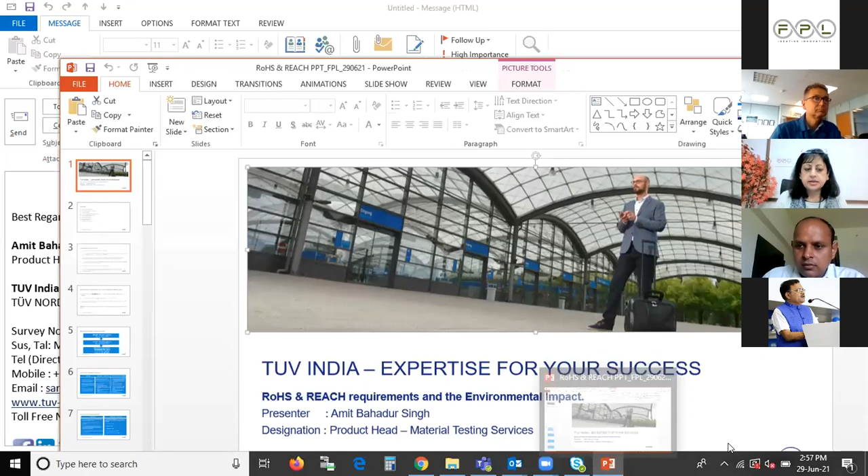Are you able to share your screen? Is it visible to you? Yeah, it's visible, this is my screen. It's visible, yeah. Can you put it on slideshow? Yeah, now it's on slideshow. Yeah, good.

So in the meantime, I'm sending these slides to you also. Yeah, please send it because somehow in between I'm losing connection, so I think I'll have to connect over mobile and put you on the speaker. Connection is weak, Alexi, your connection is okay na? I think we can hear you loud and clear. Yes, it seems okay today. And what about me? Yeah, it's okay too for me. Your signal is going off in between, coming.

So Amit, Velumurugan, can you just see if we can put him on speaker? Just do a try, we call him on phone and put him on speaker. Yes, we have connection issue here. No, Amit Bahadur, hello, I think I'm clear to everyone now. Yeah, you are clear, you are clear. Now you are clear.

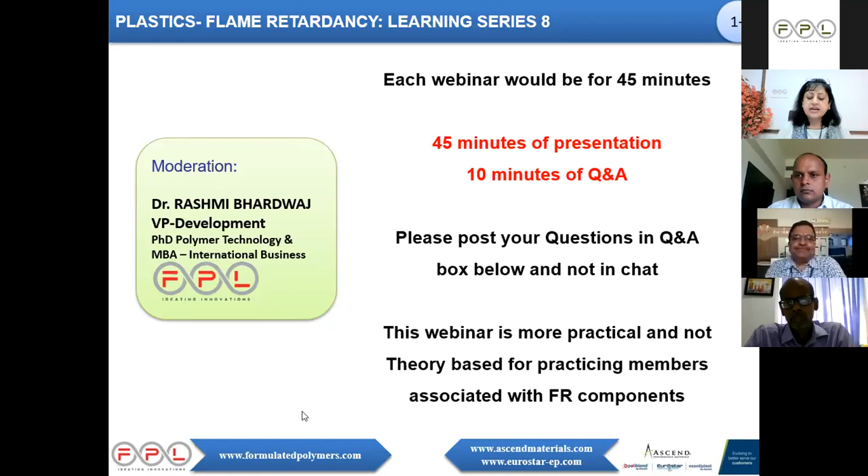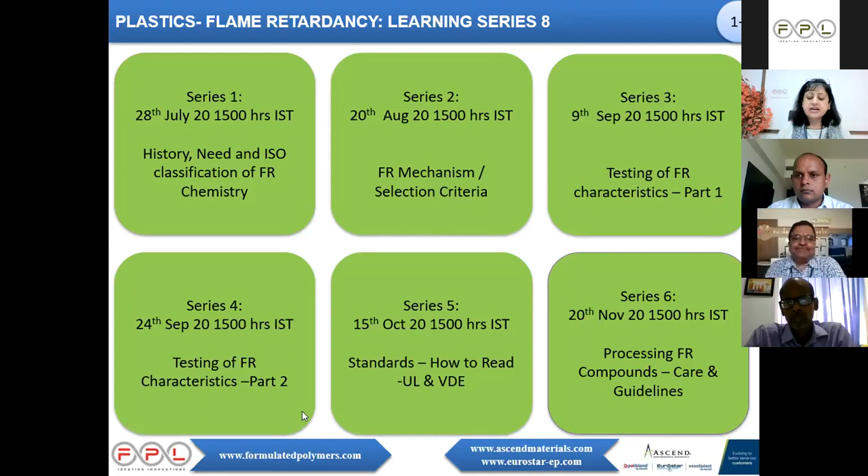Just a quick recap that we have already done Series 6, where we have gone right from history to mechanisms, testing, characteristics, standards, UL, VDE, processing, and we've also covered the design perspective. Today's session is the 8th session, on environmental impact. There are around 4 more sessions planned as of now, but we can take it further in case there is more interest.

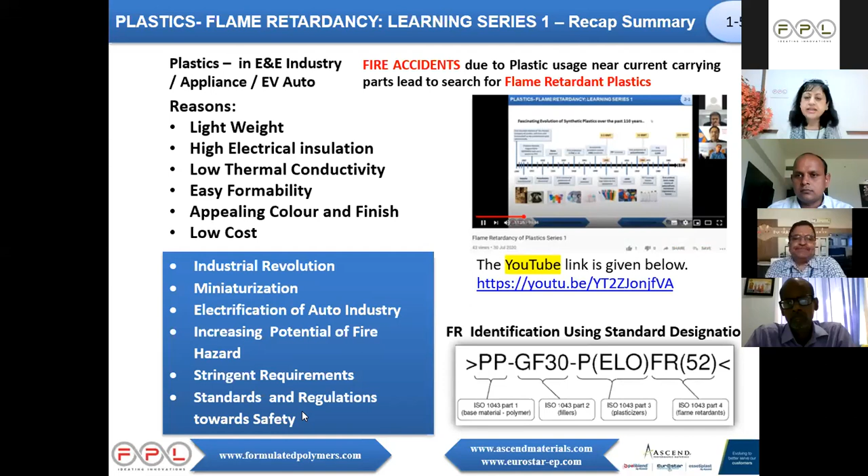So if I go back to our sessions, what we covered earlier was basically flame retardant plastics, and what ISO norms are being followed by all of us, especially in terms of classification. We covered the flame retardant mechanism in Learning Series 2.

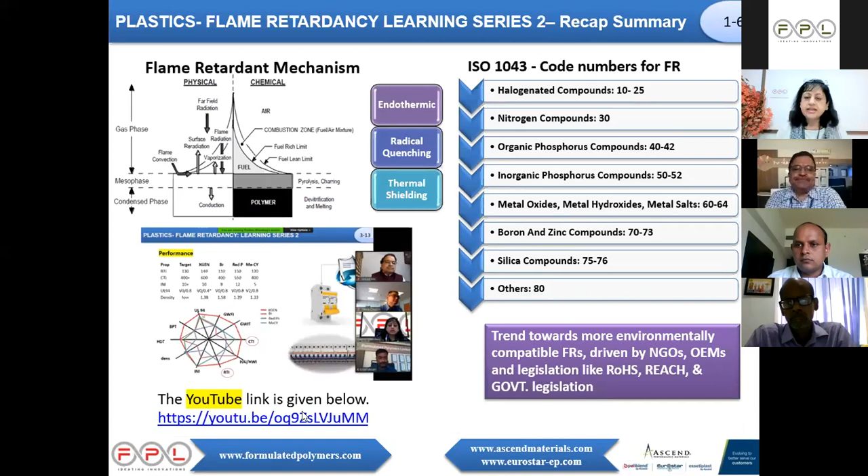In Learning Series 3, we had Mr. Krishnamurthy and Alexei giving 2 sessions, 3 and 4, with respect to UL94 testing and glow wire testing, because sometimes we consider them similarly but we have to understand the total mechanism and the reason why these tests are done. So we had this entire session.

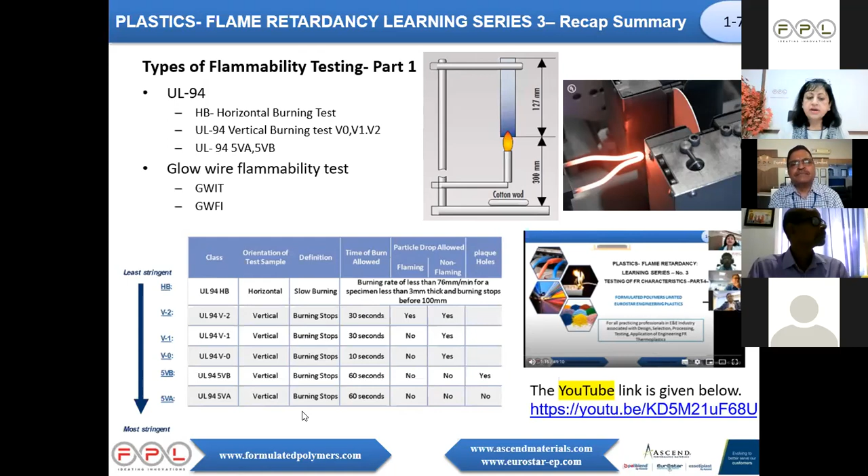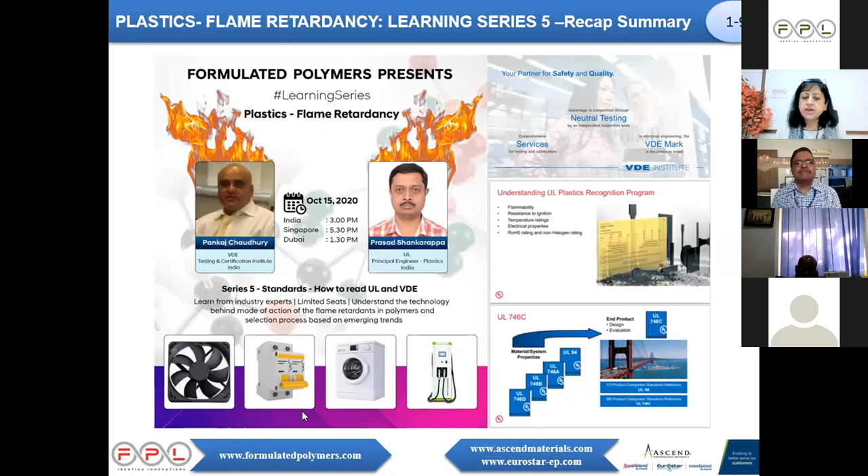Series 5, where we covered standards, like how do you read a UL standard? We are all aware of UL standards, but sometimes we don't have clarity in terms of what we have to read in those standards. So we had a session with Mr. Chaudhury on VDE, who's head of India operations for VDE testing and certification.

Then we had another session in terms of processing, that's Series 6, where Mr. Satish Kumar, Principal Architect at Schneider, and Alexei gave us their insights on how to process FR compounds, what is important when we are processing these compounds, and how do we capture the part quality and consistency for these materials.

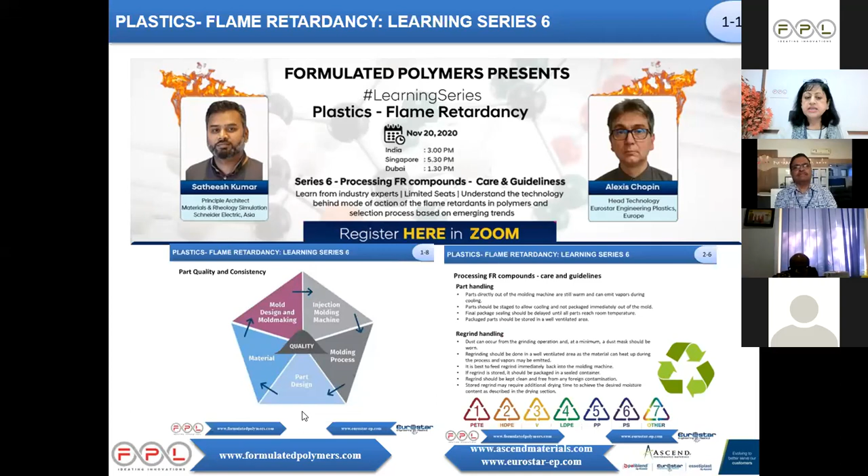Then the last session, earlier this year, was on design perspective in flame retardant components, where Mr. Prashant Vairagi, who was earlier with L&T, now with Schneider, gave an overview of switchgear applications. And in his presentation, Pradeep Chowdhary discussed in detail regarding product design optimization with

FR compounds. That's like disruptive innovation in product design, manufacturing, engineering, and simulation, where he covered a number of applications, right from simple automotive applications, the general purpose ones, to the specialized applications and the requirements in terms of design, where aesthetics is important as well as technical functionality.

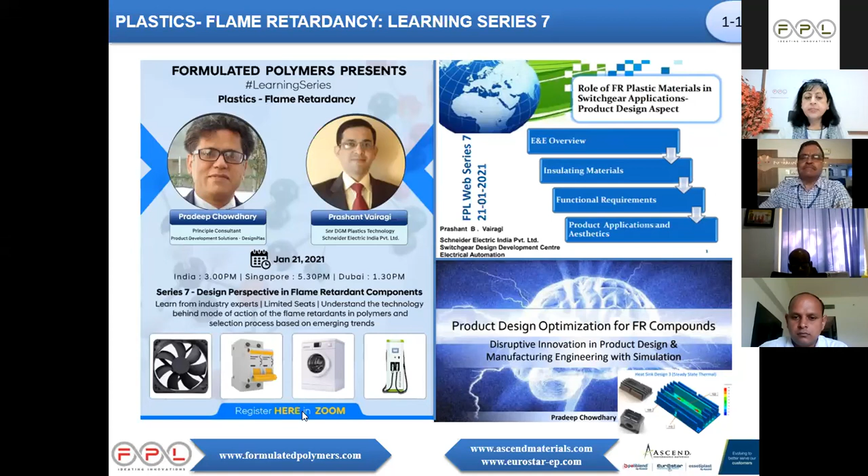Now coming to this session, we have our speakers on the environmental impact. Mr. Amit Bahadur Singh will be presenting from Eurostar Engineering Plastics, now Ascend Performance Materials. Some of the industry professionals have agreed, and some have already presented, and we would request

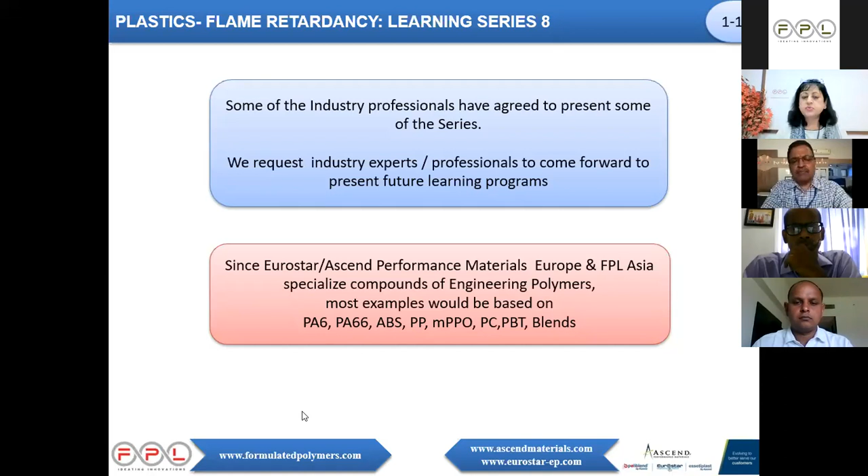Just to cover basically, STARFLAM is manufactured by Formulated Polymers Limited and Ascend Performance Materials, and is available in both reinforced and unreinforced polyamide grades with high impact and tight tolerances, flammability values of UL94 V2 to V0 down to 0.4mm thickness, 5VA, 5VB classification, as well as UL746 polymers like polypropylene, ABS, PC, PBT, etc.

So we have around 120 UL yellow cards. Comparative tracking index values go up above 600 volts. RTI above 120 degrees centigrade up to 150 degrees centigrade. Various compliances which we are discussing today in detail. Excellent ductility and low warpage, easily laser markable.

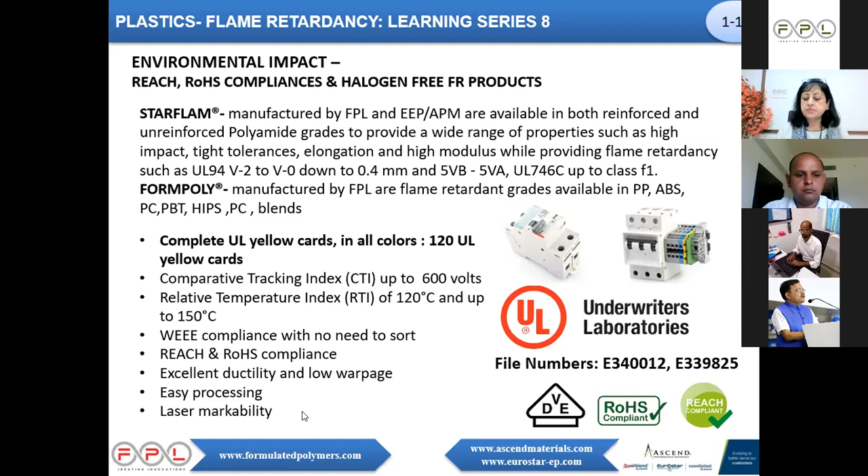Just to give a brief about our speakers, Mr. Amit Bahadur Singh is based in Pune. I've shared his mobile number and email ID just in case someone wants to get in direct touch with him; you can communicate by mail. Amit Bahadur Singh has 12 years of experience, a versatile background having worked with Huhtamaki, Positive Packaging, and SGS India Private Limited, presently with TUV. He has an MSc in Physics, a Masters in Marketing Management, and rich experience in REACH, RoHS regulatory compliances and product risk management. He is a CQI IRCA approved ISO 9001 quality management system certified lead auditor.

So we look forward to hearing from him regarding what is the environmental impact, what exactly REACH and RoHS are, why are these compliances so important, and why it's gaining even more importance as we move forward. So we look forward to you, Mr. Singh. The other speaker is Mr.

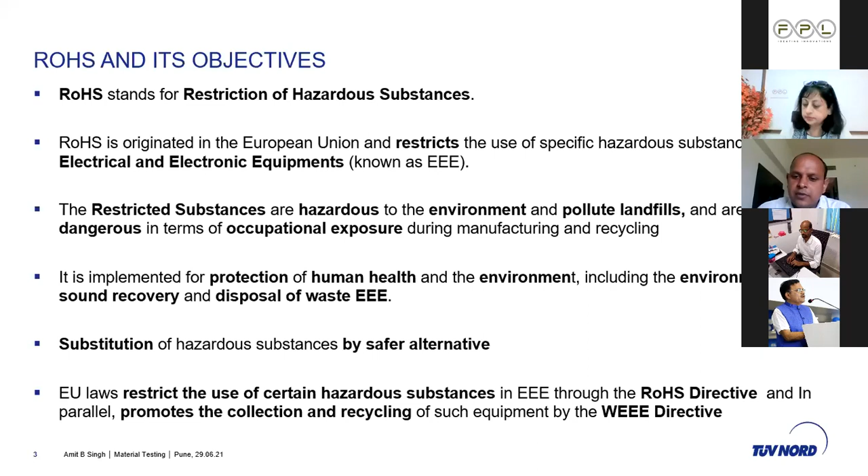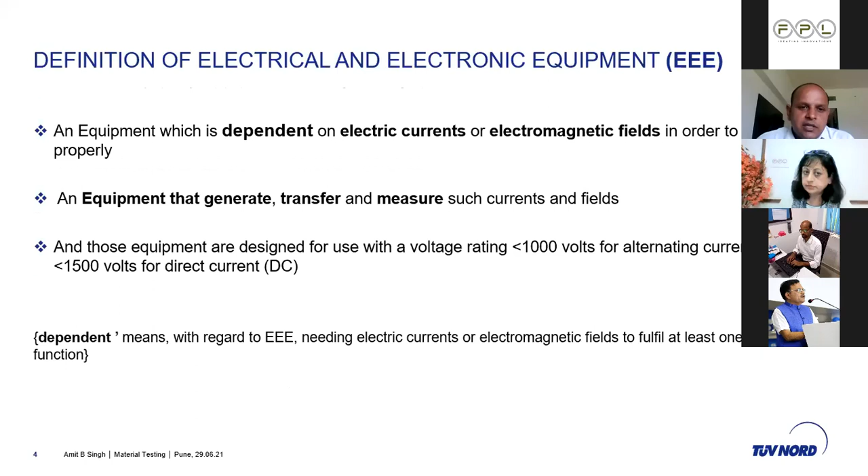This is the definition given in RoHS 2: any equipment dependent on electric current and electromagnetic fields to work properly, or equipment to generate, transfer, or measure such currents, is considered electrical equipment. EEE is considered as such if voltage rating is less than 1000V AC and DC voltage is less than 1500V. This is the journey from the initial directive 2002/95/EC, that is RoHS 1, to RoHS 2 and its amendments.

RoHS 1 came into effect on July 1, 2006. RoHS 2 came into effect with a second amendment in Annexure 2, adding 4 more elements to the hazardous substance list. It came into force on 22nd July 2019, and will be fully effective from 22nd July 2021.

So we are discussing RoHS 1. In the RoHS 1 overview, there was no formal certification, declaration, or labeling system for attesting compliance. Two categories were exempted: medical devices and monitoring control instruments. Producers or manufacturers of EEE had to show evidence only when asked by authorities. There was no formal certification like a CE mark or a testing RoHS-compliant logo on the product; it was not a requirement of RoHS 1.

In RoHS 1, 6 elements were listed: lead, mercury, cadmium, chromium 6, PBB, and PBDE, basically known as flame retardants. The categories covered in this scope were taken from the WEEE directive, which listed 10 categories. RoHS 1 covered these, and 8 and 9 were not in its scope.

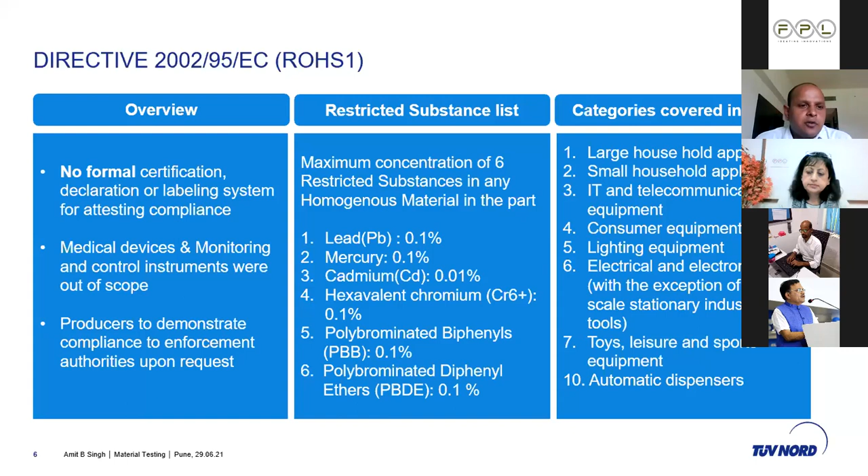RoHS 2 is a recast directive to make it simple, effective, and enforceable. Earlier there was no clear definition for EEE, and no clear definition of the manufacturer's obligations. This recast directive, RoHS 2, came for aligning and harmonizing with other EU legislation, and it covers all EEE not covered under categories 1 to 10 by introducing a new category, category 11, under which all remaining things were covered.

The list of substances does not change in RoHS 2. The same 6 substances listed in RoHS 1 are listed in RoHS 2, and their maximum concentration is calculated on a homogeneous material basis.

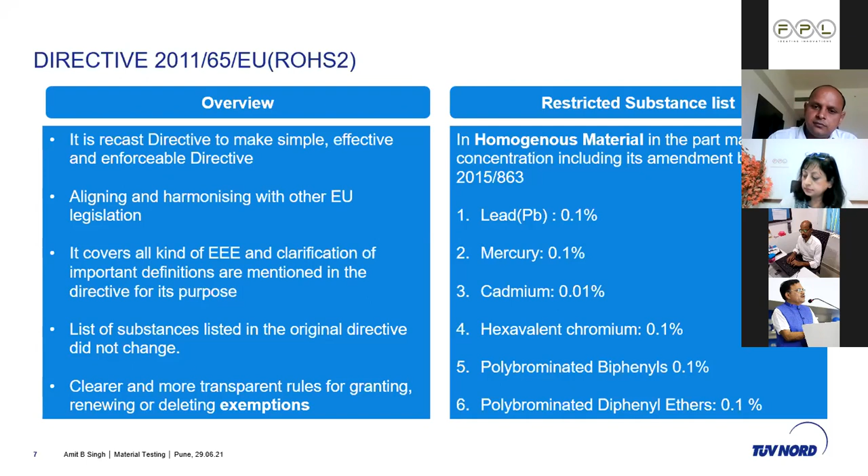So nothing is left. As I told you earlier, this came as a recast directive, and the purpose was to align these requirements with other regulations. They have given a special condition that RoHS shall apply without prejudice to requirements of union legislation on safety and health, and REACH, and requirements of specific union waste management legislation. So RoHS will be applicable, and these other regulations will also be applicable side by side, like the REACH regulation.

So what is out of scope? Anything for national security and military equipment is out of scope. Equipment sent to space. If any equipment is part of an exempted category, that equipment will also be exempted, like large scale stationary industrial tools, non-road mobile machinery, and active implantable medical devices. So these are the categories actually out of scope from RoHS. Otherwise RoHS is applicable.

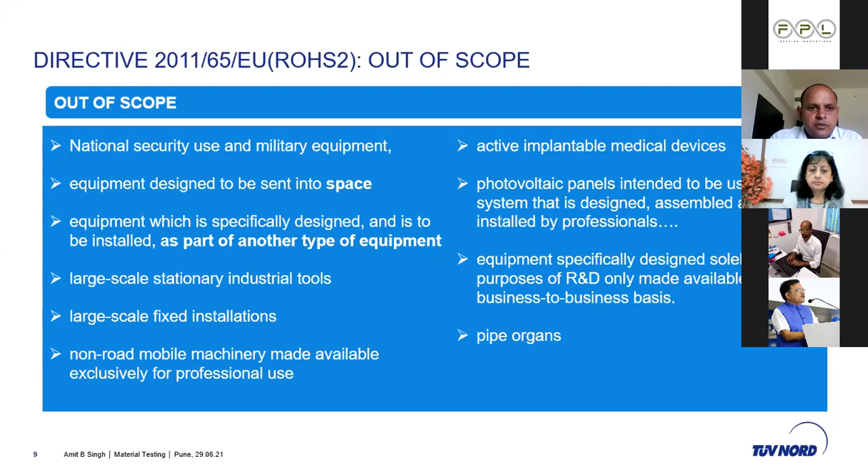So the highlight of RoHS 2: as we discussed, there was no category 8 and 9 in RoHS 1. This RoHS 2 added these categories, and introduced category 11, which impacts wires, cables and connectors.

Application exempted: they have exempted all categories except 8 and 9, and other categories also, like medical devices and monitoring devices. They have a separate exemptions list, listed in Annexure 4. Annexure 5 gives the format for granting, renewing, and revoking exemptions. So anybody who wants to apply for the grant of exemptions, or wants to renew or revoke exemptions, has to apply using this format.

And there is a format given for the European Declaration of Conformity. So if any manufacturer wants to place the EEE in the European market, they have to use this format for the declaration of conformity.

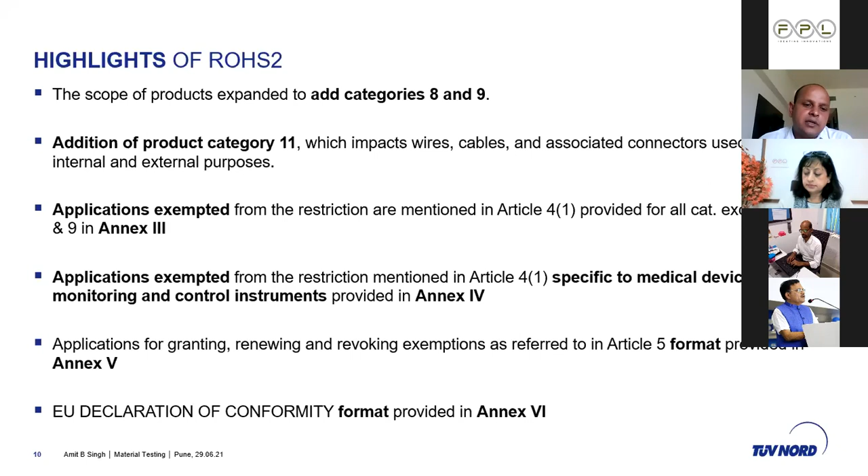So in RoHS Article 7, the manufacturer's obligations are mentioned. Other obligations are also mentioned in this RoHS directive, like importer's obligations, supplier's obligations, and so on. But I have taken only Article 7, which is applicable to manufacturer's obligations. They have given that manufacturers have to draw up technical documentation, carry out internal production controls, and provide a declaration of conformity statement along with the EEE, meaning electrical and electronic equipment, and they have to affix CE marking. So now if anybody affixes this CE marking, that means the product will be considered a RoHS compliant product.

And RoHS 2 Article 18 covers market surveillance requirements. Earlier, in RoHS 1, there was no such requirement, but in this RoHS 2 directive, it is especially mentioned.

Requirements for CE marking and declaration of conformity became effective from 2013. Additional record keeping requirements also became mandatory to demonstrate compliance. So during the service life of equipment, if enforcement authorities ask for compliance documents even after 10 years, you must have those documents. This is a mandatory requirement.

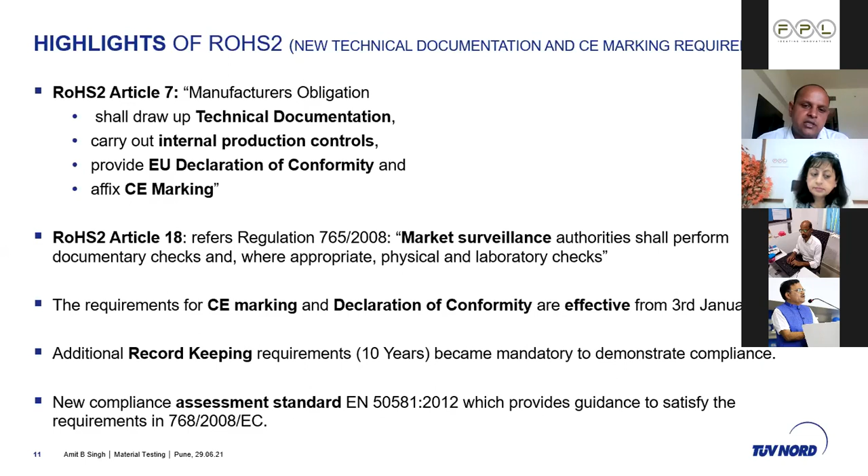And they came up with the assessment standard EN 50581:2012 also, to fulfill the requirements of 768/2008/EC, which are mentioned in this RoHS directive.

So there is one amendment directive that has come for RoHS 2, known as 2015/863, but people in general are saying it is RoHS 3 - but it is just an amendment to Annexure 2 of RoHS 2. This amendment added 4 phthalates: DEHP, DBP, BBP, DIBP, with a max limit of 0.1%. So now the total list has become 10 substances.

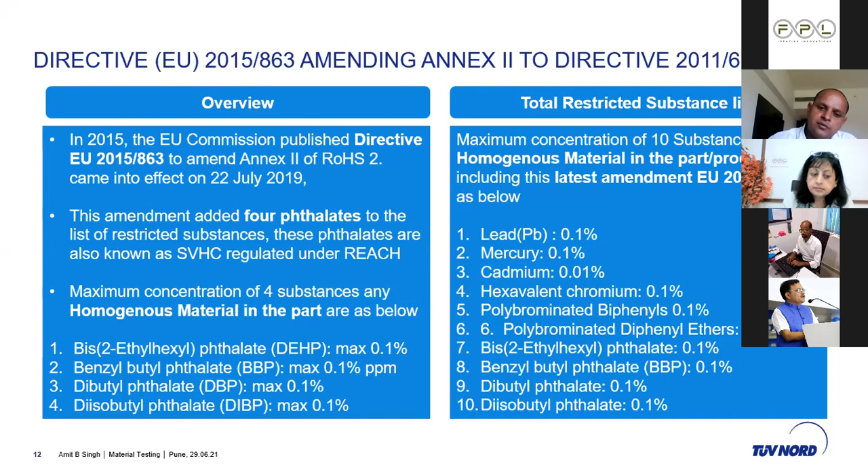So if anybody wants to comply with the RoHS requirements, RoHS 2 requirements, they have to comply with this amendment directive also. They have to see the compliance and observe the limits mentioned for the 10 elements.

So what are the requirements for compliant products? They should comply with maximum concentration values per homogeneous material, for the 10 elements, and also comply with the procedural requirements, like submitting a declaration of conformity statement and affixing the CE marking logo on their EEE or product. These are the mandatory requirements.

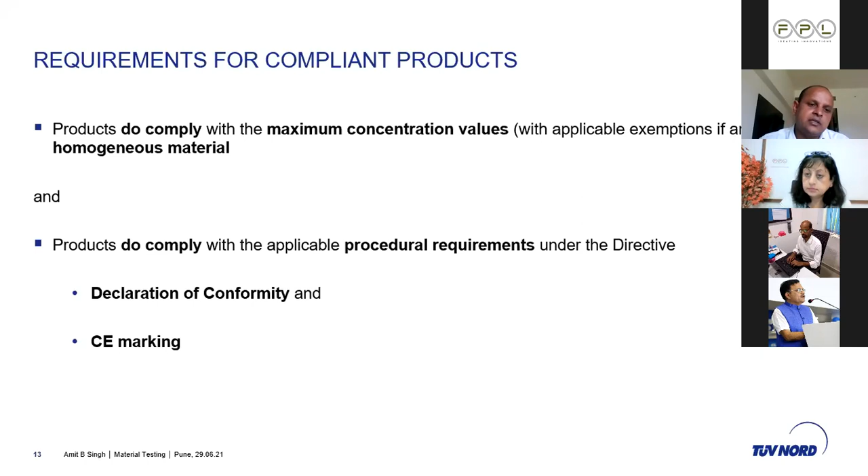If anything is missing, it will be considered a non-compliant product. Like if you are complying with the maximum concentration values per homogeneous material, but not submitting the declaration of conformity along with the equipment, it will be considered non-compliant. If you are submitting the DOC but not affixing the CE marking logo on it, it will also be considered a non-compliant product.

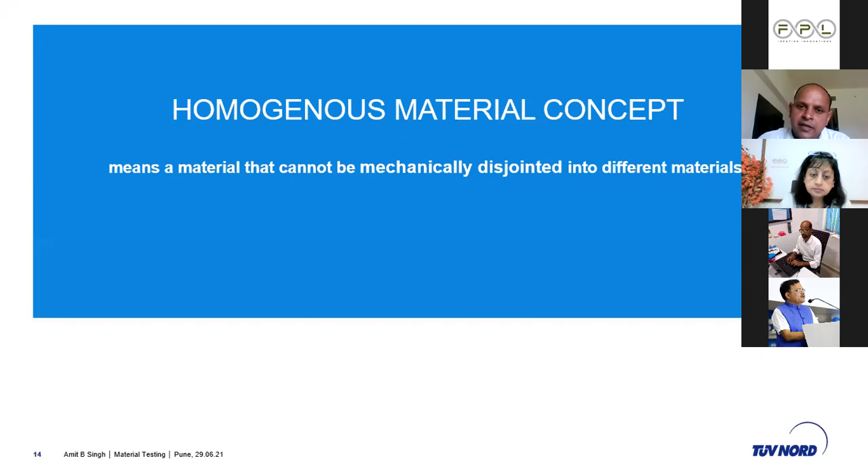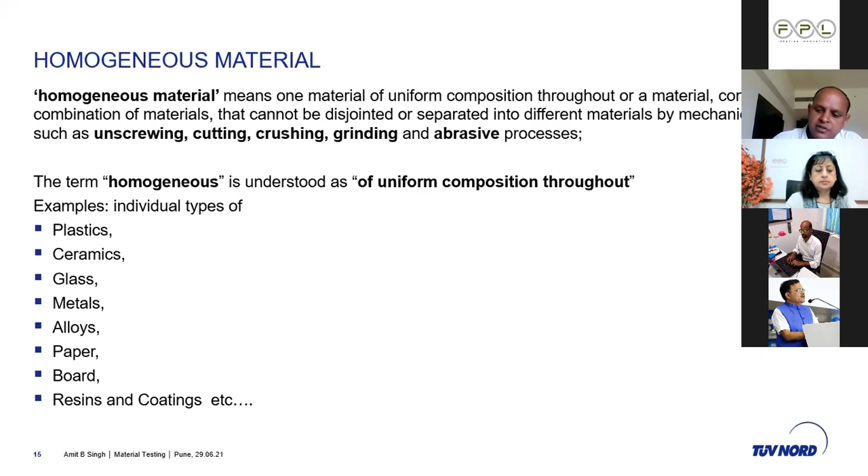So basically, we always talk about maximum concentration limits of 10 elements in homogeneous material concept. Homogeneous material is a concept actually defined under RoHS 2 only, meaning any uniform composition throughout the material, or components we cannot actually separate into different material by unscrewing, cutting, crushing, grinding, and abrasive process. Those components will be considered as homogeneous material. Examples are plastics, metal, alloys, paper boards. This is just for illustration. So if we have a mixer grinder, we have to test for maximum concentration at our laboratory. So we will actually go for this process.

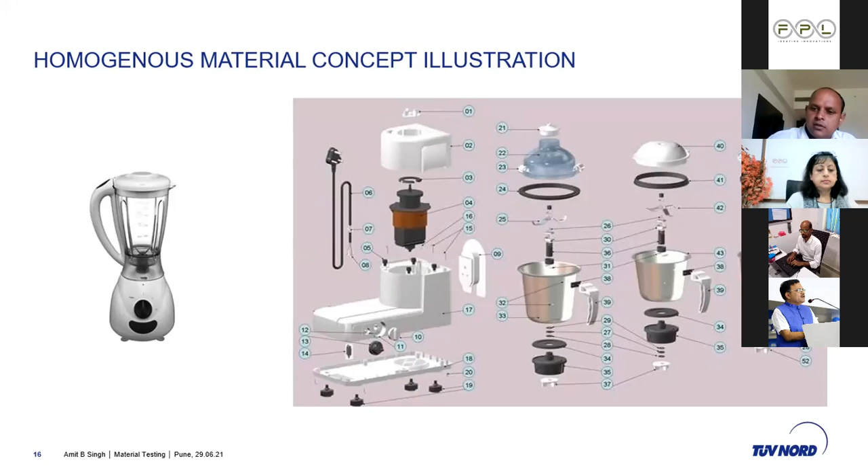So this was actually an overview of RoHS 1 and RoHS 2 and its amendment. Now we'll discuss about this EU REACH regulation.

So the agenda is to discuss this REACH regulation overview, purpose, scope, and what are the duties of communication or notification for the suppliers or manufacturer. REACH stands for R for registration, E for evaluation, A for authorization, and restriction of chemicals. It came into effect on 1st June 2007 and replaces approximately 40 pieces of legislation within the European Union. Earlier, if you wanted to export from one country to another within the European Union, you had to comply with the requirements of both the country of destination and country of origin. Now, after REACH came into effect, you have to comply with REACH requirements, and you can sell your products freely all over the European Union.

REACH actually places greater responsibility on industry to manage risk. Means if we are putting chemicals in the European market, we are responsible that it should be safe for the environment and safe for human health. They created one agency known as the European Chemicals Agency.

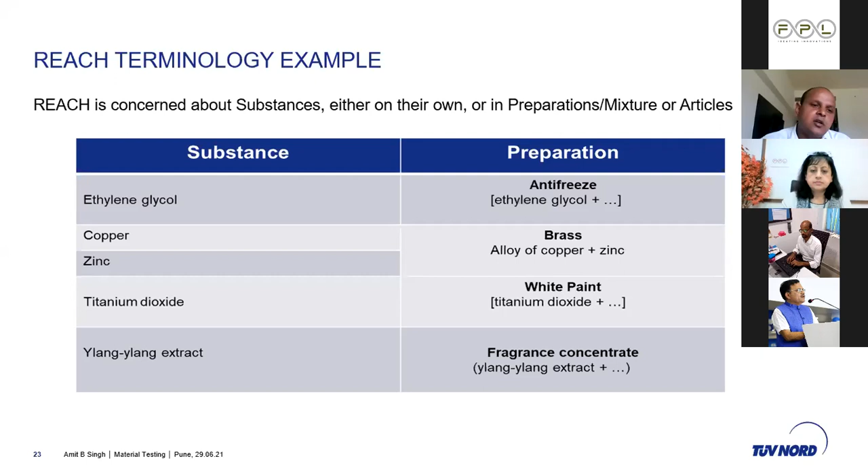So the scope of the regulation means REACH applies to the manufacturing, importing, placing on market, and use of substances on their own, meaning in pure form, in preparation or mixture, or in article. It applies to all chemical substances, not only those used in industrial processes, but also in our day-to-day lives, such as cleaning products, paints, and articles like cloth, furniture, and electrical appliances. So it is applicable everywhere, to everything which is not exempted under REACH.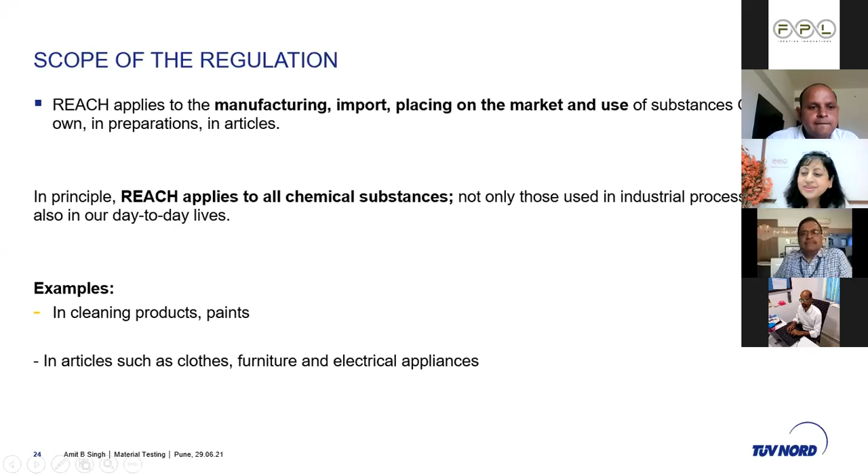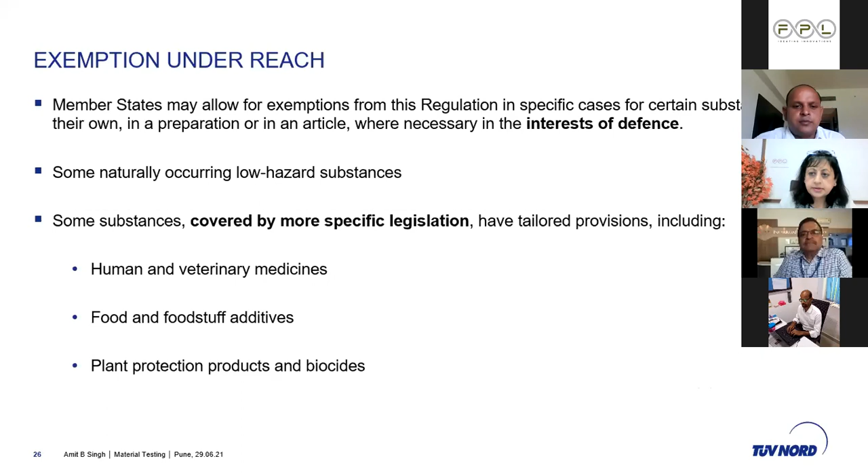So these are the list. If any legislation has requirements more stringent than REACH, those are also exempted, like human and veterinary medicines, food and foodstuffs, additives, plant protection products, and biocides. Those are exempted under REACH.

Yeah Amit, we are running short on time, so can you do it?

So registration means REACH registration. You have to submit data, hazard data, to the authorities, and they will examine it for registration. So any substance manufacturer placing any substance more than 1 ton per year in the European market has to register their substance. If they are placing more than 10 tons per year, they have to submit a CSR also.

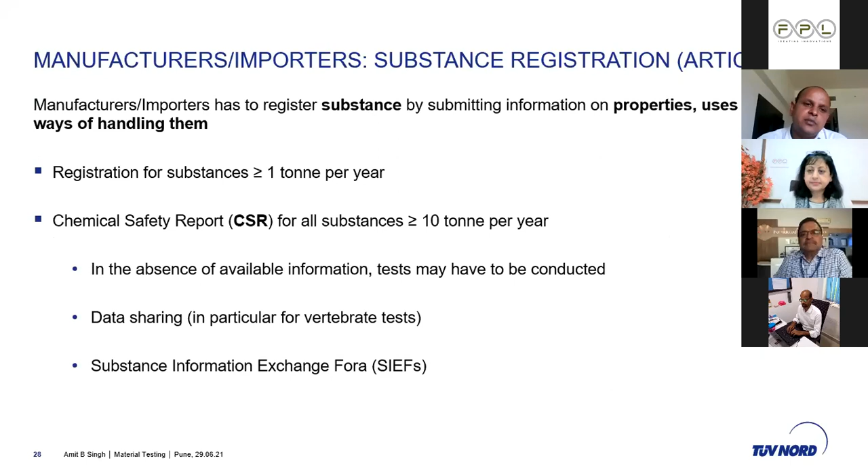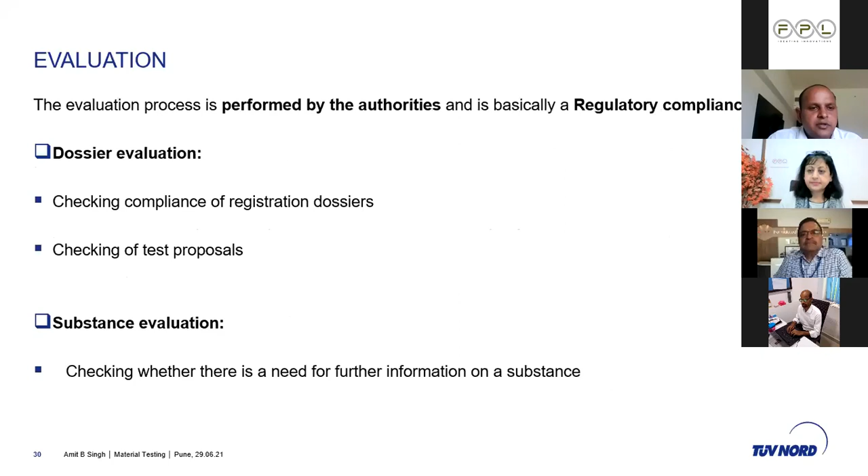So who has to register? Manufacturers and producers have to register. Importers can register, or only a representative can be assigned. Evaluation means whatever registration dossiers we submit are evaluated by the authorities. So this is known as evaluation.

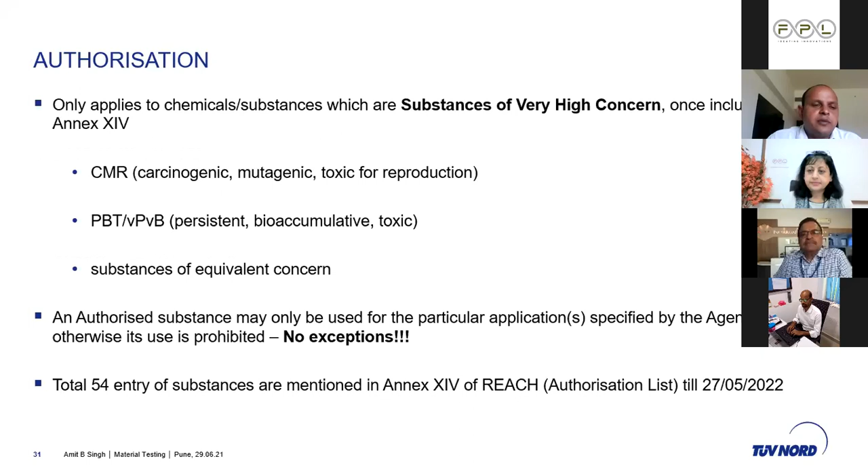So authorization means it applies to SVHC, which is actually a category of CMR, PBT, vPvB, or substances of equivalent concern. So some of them actually go for further authorization, and people have to apply for the authorization. So restriction of chemicals: if more regulation is required for some chemicals, those are listed under the restrictions list, that is the Annex 17 list, which is applicable to all manufacturers and importers, meaning if those are placed in the European market.

So this is actually the article manufacturer under REACH. To register, if released from articles and they are placing that substance at 1 ton per year, then they have to go for the registration process. Otherwise, they have to notify that substance if it is in the candidate list, that is the SVHC list, and they are placing more than 1 ton per year, and concentration is more than 0.1%. So if these criteria are met, they have to notify to ECHA. And for communication, that is actually the requirement of Article 33.

It is applicable to the article supplier. They have to communicate if anything is present more than 0.1% and is an SVHC. So these are the requirements listed in REACH as article manufacturer. There are exemptions also: if you are using that substance and that substance manufacturer has already registered for that use, then you don't need to go for registration. Also, if that particular substance is registered by the substance manufacturer itself, and if you can avoid exposure, then it is also exempted.

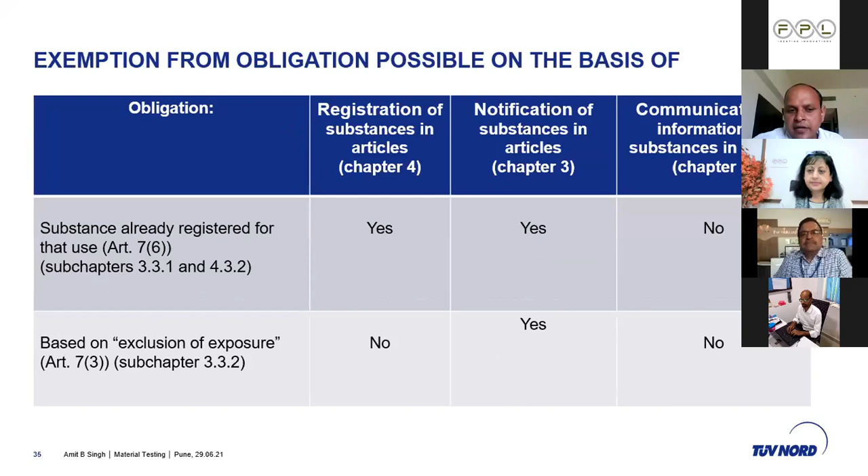So normally, if we are out of the European Union, we have to search what SVHCs are actually listed by the European Chemicals Agency. You have to find out if those are actually present in your article or not, more than 0.1%, and if you are placing those things more than 1 ton per year. Then, on the basis of that, your obligation will start, meaning you have to notify it if it is more than 1 ton per year. If it is not, then you have to communicate to your supply chain only. So until now there are 211 substances listed as SVHC, and you have to perform the test, or you can get data from your supply chain if those are present in your product or not, and that testing can be done at TUV India also.

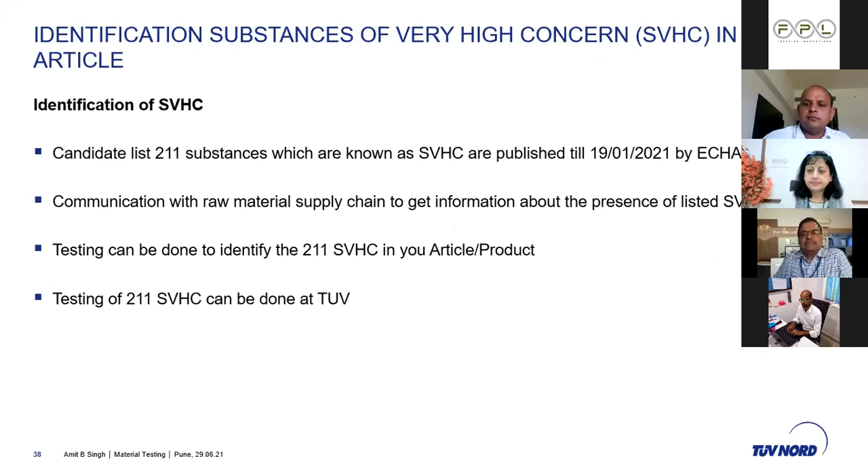Thank you. Thanks a lot, Amit. I'm audible? Yeah, quite audible. Okay, thanks a lot, Amit. Wonderful presentation also.

I think in terms of discussion, you have discussed regarding REACH, the registration, evaluation, authorization, and restriction of chemicals, regarding the exact chemicals which can be used and which cannot be used. I understand that it's important for both the manufacturers, the importers, as well as the customers. They have to be aware of the health and safety repercussions in case they are importing. And I think what you discussed was, in terms of greater than 1 metric ton, SVHC is something which is critical.

Also, I think a wonderful insight in terms of RoHS. Most of our people are aware regarding RoHS, but I think today's session brings in clarity regarding what exactly we require as far as restriction of hazardous substances is concerned. I think everyone was aware regarding basically lead, mercury, cadmium, and hexavalent chromium, which have been banned for quite some time. But I think the latest modifications and changes have included polybrominated biphenyls, bis(2-ethylhexyl) phthalate, butyl benzyl phthalate, dibutyl phthalate, and diisobutyl phthalate.

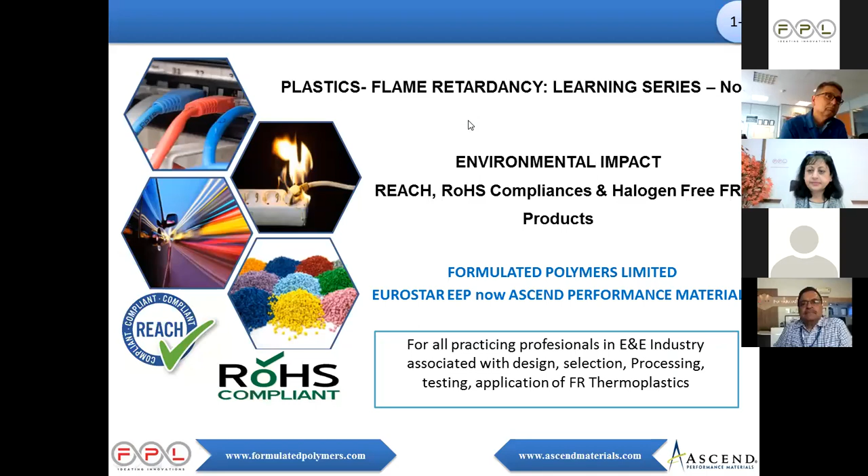I will be very short because we are running a bit out of time, so I will simplify what I have to present. But I would like to pose a few questions to Amit too, because it was a very nice presentation and it opens questions even for me. Okay, let's go to this presentation.

I think you can see. So we are now in a new company called Ascend Performance Materials, and we have to talk about safety. This is the best case for me to talk about safety, because flame retardant in plastics is inherent safety, meaning you are adding safety to your plastics, and it's so much important as a product. But meanwhile, flame retardant is not as simple as that. People think, yes, I buy a material from you, I just need a color, an anti-static agent, a lubrication agent, and this is simple.

When you are talking about flame retardancy, it's so much different. It's not just a matter of a few changes, you're really changing your formulation, you are changing your product. This chart explains really what it's about. If you flame retardant, you have to make compromises - the right one at the right cost, right application.

But it's not universal. It depends also on the thickness of the part application. We have some systems that work very fine for high thickness, and systems that work very fine mainly at low thickness. So yeah, I'll move on - if it's not okay, just tell me.

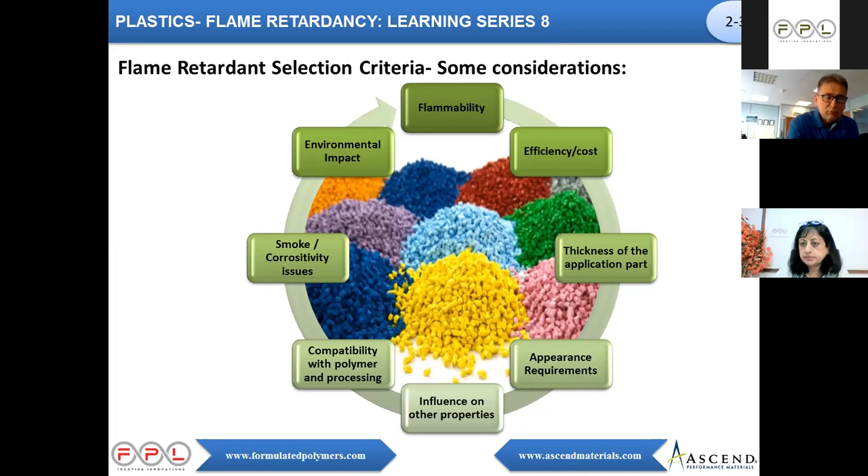And of course, which is getting more and more important now, is the environmental impact. Why? Because flame retardants are sometimes chemicals, and when you are playing with a flame, you have to find a mechanism to stop the flame. It's not made only by very simple things - you have to use real chemicals to fight the flame.

So if we scroll rapidly through what it's about - this is mainly here for polyamide, because as Rashmi said, our company is really focused on polyamide, and we are quite strong in this business. Whereas for some others, we have halogenated compounds, the ISO code for this one is 10 to 25. So halogenated is quite an old material, but still very effective. Nitrogen compounds, organic phosphorus compounds, inorganic compounds, metal oxides, boron, and others.

All of those have a different trace in terms of environments, in terms of impact - impact not only in producing those flame retardants, but in using them. Some of them exhibit a hazard when in use, some others while they are produced, and some others while they are transformed. And all that has to be in line with requirements that are not only mechanical or regulatory requirements, but also part requirements. This is what we see here.

When we are using a flame retardant formulation of product, you are facing a world of regulation. You have, of course, technical regulation - these are well known, the IEC standards, meaning the baseline to enter those markets. You have to comply with certain rules. But you also have environmental regulation, and this is what Amit says - it's really becoming more and more important in the business. If you don't comply with those regulations, you simply cannot use the material. And you have eco-labels - non-government organizations are now putting a lot of pressure on materials and on those labels.

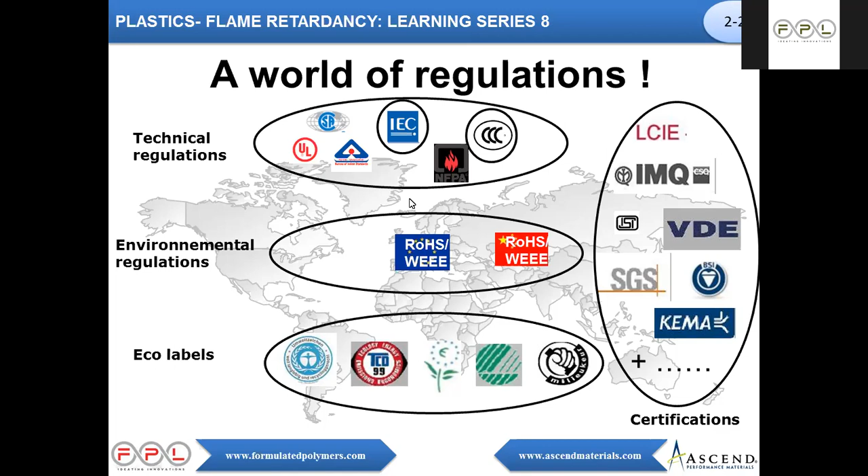You need to comply with regulations that are moving, and something that is true one day might not be true another day if we discover a product might be harmful. And above all, depending on where you are located on the globe, you have to comply with different certifications. All this makes it very difficult, because you have to comply with so many things.

Here in this chart, it's kind of polymer compatibility regarding flame retardant. Of course, when you are designing a flame retardant, it's an interaction with the polymer. It's not just adding an additive in a formulation that works everywhere for every application in every condition. It's always a matter of compromise. Polymers are only fuel derivatives, meaning crude oil that has been refined and transformed into a polymer, so basically it burns. You have to use different strategies to make it flame retardant.

We won't go into details from the chart, but you see that depending on the nature of the polymer, you have different ways to choose from flame retardant, and some of them are more or less environmentally friendly.

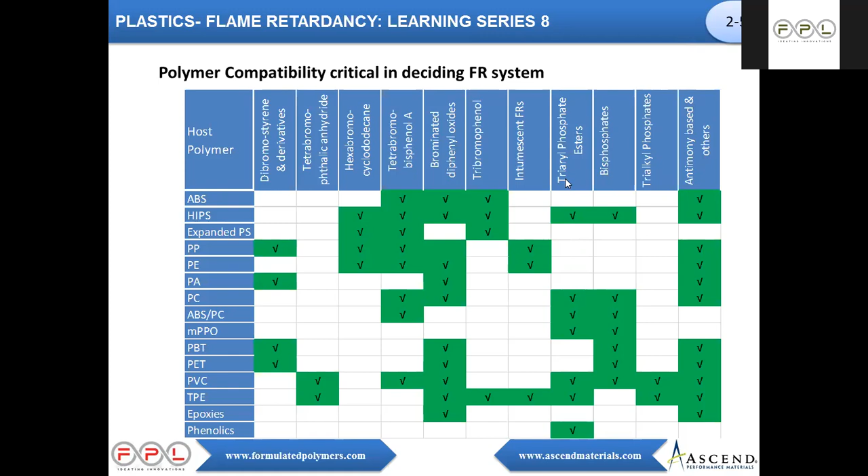In terms of performance, this is what I tried to explain previously. When you add, for example, a reinforcing agent, let's say glass fiber to a polymer, you have to look at all this kind of spider chart. But here, with flame retardancy, you are in another dimension, because flame retardant has an effect not only on electrical properties but many other properties.

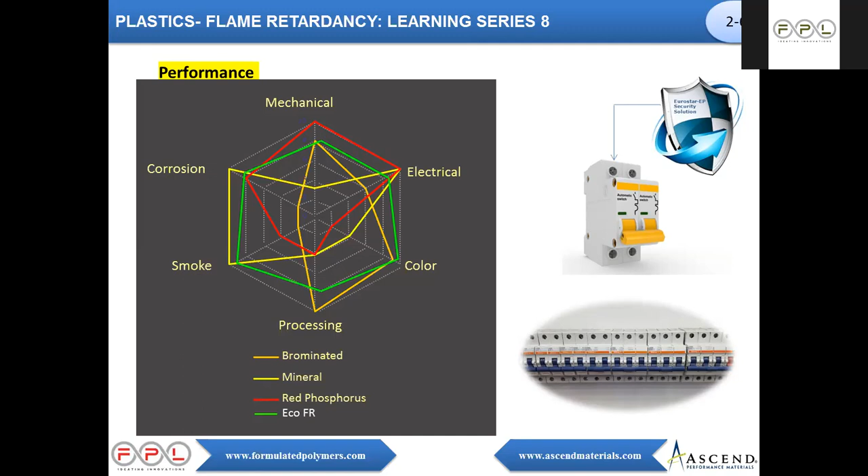For example, electrical properties might be a lot impacted by flame retardant. Some flame retardants cannot be processed at certain temperatures, because some are carried in the polymer formulation by a carrier, and in some cases the carrier is, for example, polystyrene. Everybody has burned polystyrene, and you can find or measure these very dark fumes, so smoke is an important factor.

And corrosion, which is quite new. Why corrosion? Because some flame retardants are based on phosphorus, and in some conditions can release, for example, phosphonic acid or other acids or hydrobromic acid, and those acids are quite aggressive to tools and to molds. So this is another dimension that has been taken into account.

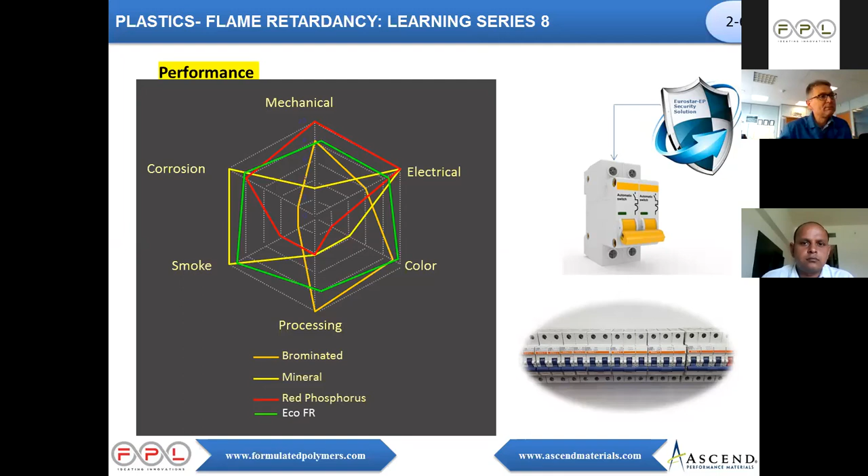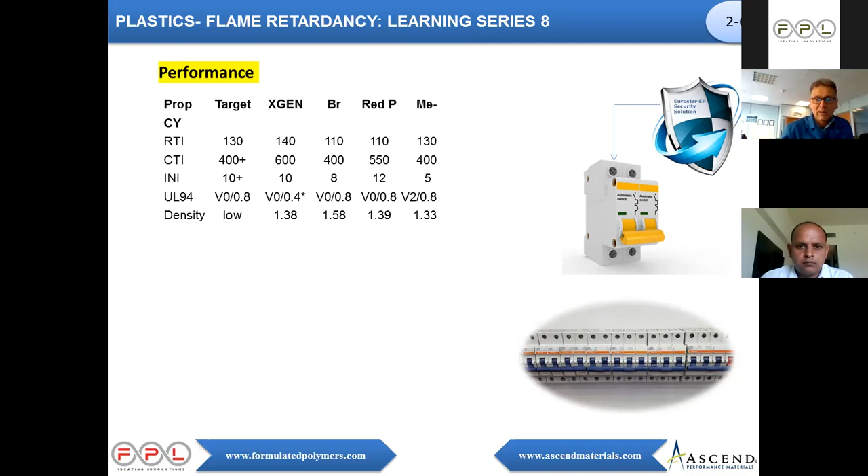Performance-wise, of course, there are a lot of things that need to be checked, but most of the time it's a compromise between electrical, mechanical, and thermal properties. I will scroll very rapidly.

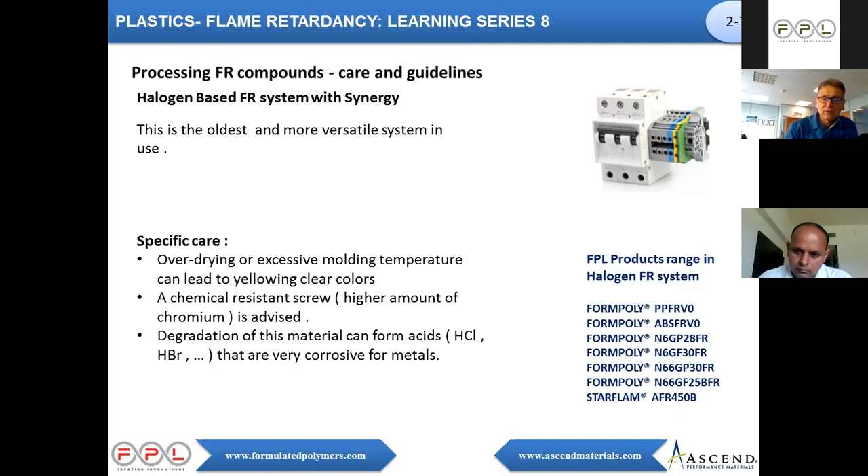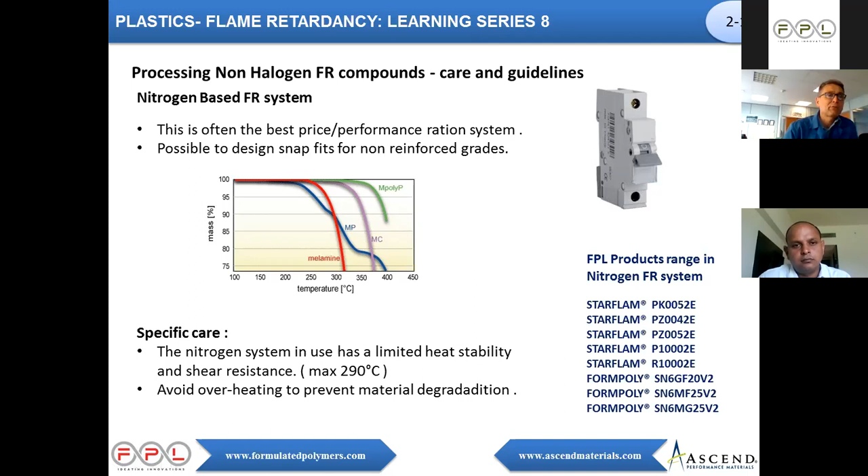Non-halogenated compounds - here we see melamine cyanurate in this case. As a takeaway, it's a very cost-effective system, a very environmentally friendly system. Limitations are mainly its thermal stability and the ability to achieve V0 rating with reinforced glass. But there too it's a proven system, and we have a very nice range, the STARFLAM range and FORMPOLY range, that covers a huge amount of products, from unfilled to glass filled, from 6,6 and copolymers. I'll go very fast because I would like to take time for questions.

Current trends, what we see as the future for plastics or flame retardants, is a growing influence of regulation and growing influence of eco concerns. So we are restrained from using a lot of things that work fine. For example, some flame retardants that work fine are not perceived well anymore. You have TPP, RDP, phenyl phosphate, that are more and more considered as chemicals dangerous for the environment. Bioaccumulative products are not perceived well anymore.

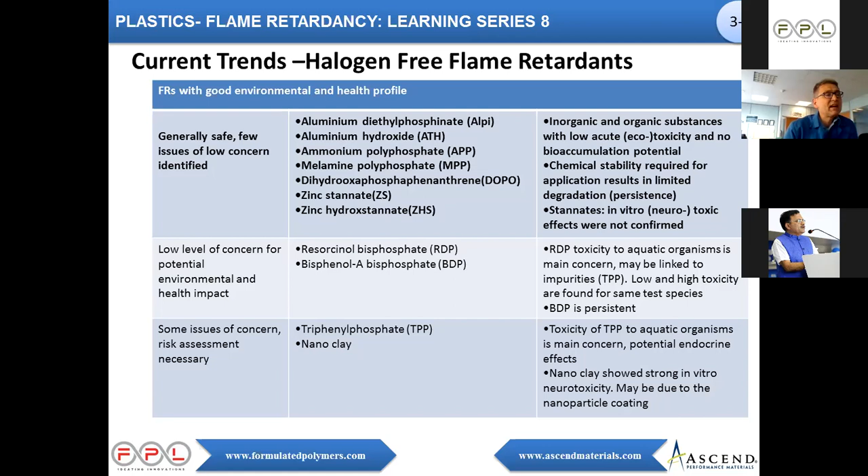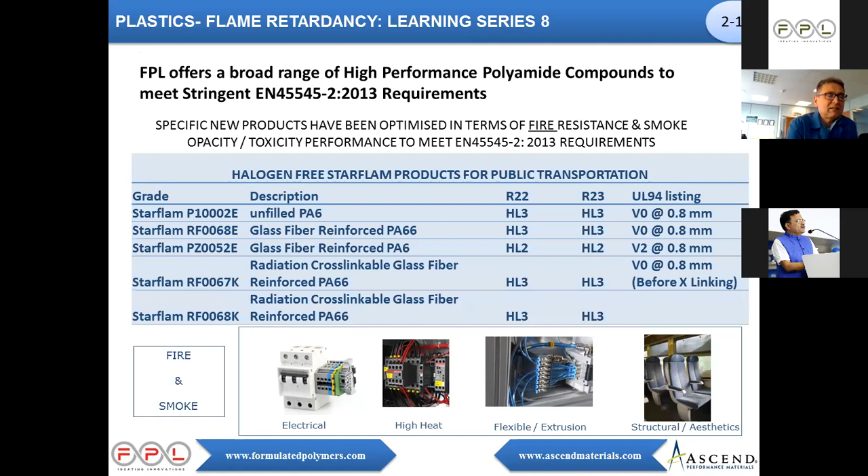So this is something we take a lot of care with in our company, to propose products on the market that are safe, not only safe in use, but more and more safe in their recycling end-of-life purpose. Flame retardant can be found everywhere, and we now have a nice range for trains, so material can be used in trains and outside trains. What's new in this regulation is we're not only taking into account flame retardant performance, but also fume toxicity, fume opacity, and everything that makes the material safe in use and safe in recycling.

As a company, Ascend FPL has a very huge range. We have more than 120 yellow cards, and most of our materials are RoHS and WEEE compliant. We also have added features like laser marking and easy processing.

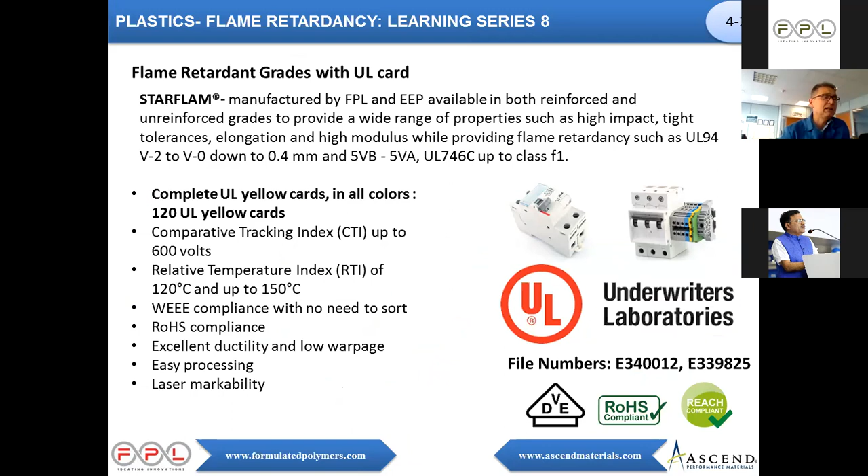I have to go very fast now. One thing that's even more important is that more and more materials and apparatus are considered unattended appliances. This makes a huge difference in terms of requirement and safety, because if you're using a handheld device and there's a problem, you just switch it off or remove the plug and you're safe. But more and more apparatus are used unattended.

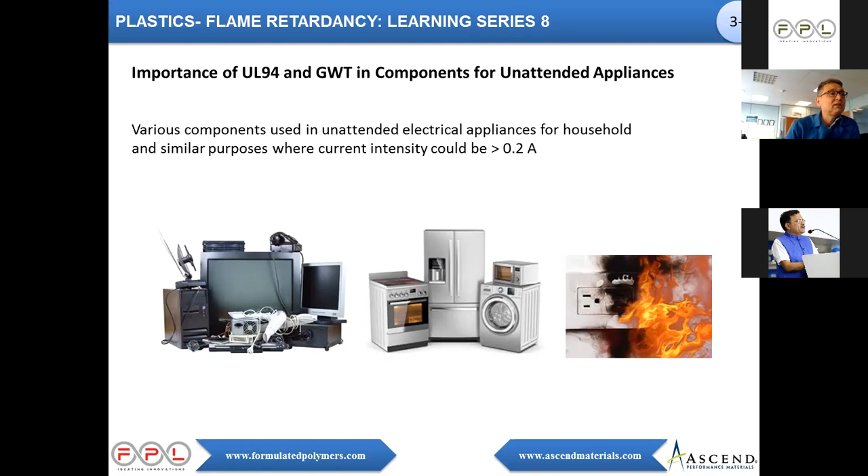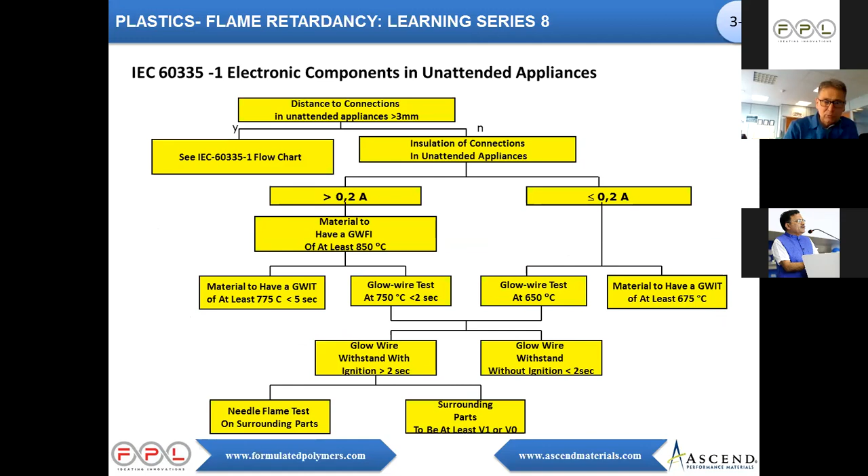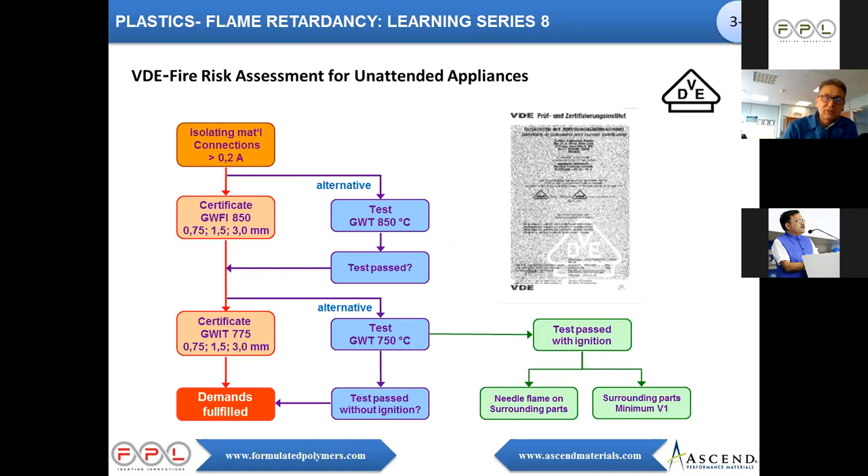One thing that's changing our lives is electric cars. They're used as an attended device when we're driving them, but if they're in the garage being recharged, they become an unattended device. I won't present this further, it's just a matter of material selection, and FPL can help you find a good material for that. Of course, it's a matter of compromise and material selection—you have options, and we have options now to find the right material.

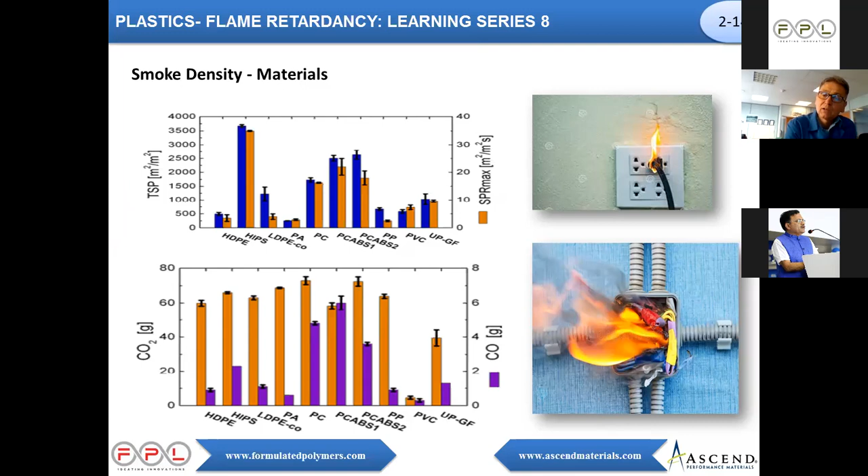Smoke density is more and more important because up until recently, flame retardant behavior was only measured by a UL test, more or less, and it was a pass or fail test. But some materials were really strong V0 materials while releasing a lot of fire and smoke, and that's no longer considered safe now.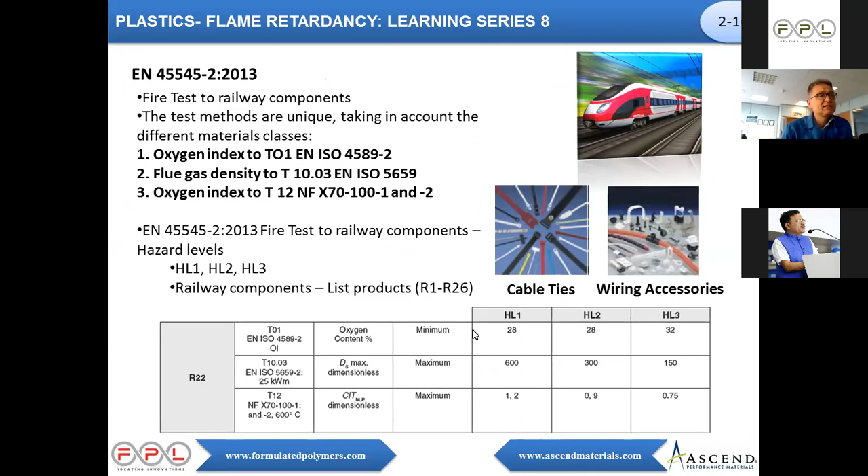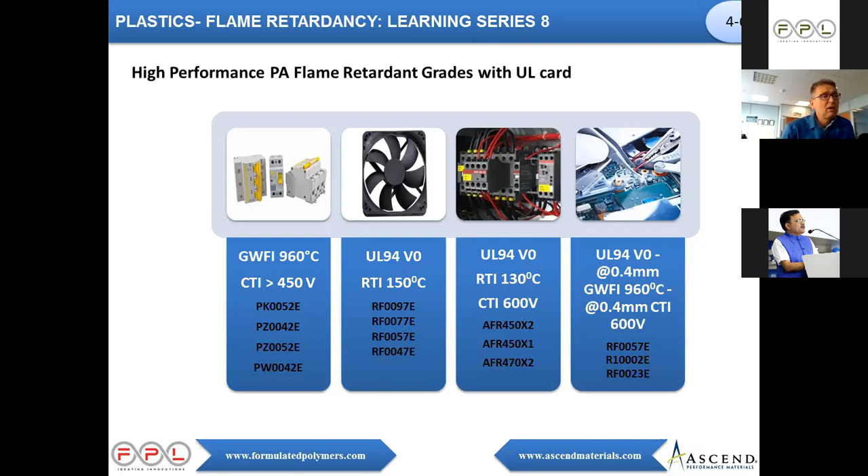This slide shows that for trains now, we're not considering only flame retardancy, but also oxygen index, gas density, gas opacity, and gas toxicity. With our range, we really have a huge coverage now—I think everything can be covered. There aren't many applications we cannot cover with the joint range we have now with FPL and Ascend. So please, if you have a request, ask, and there should be a compromise somewhere.

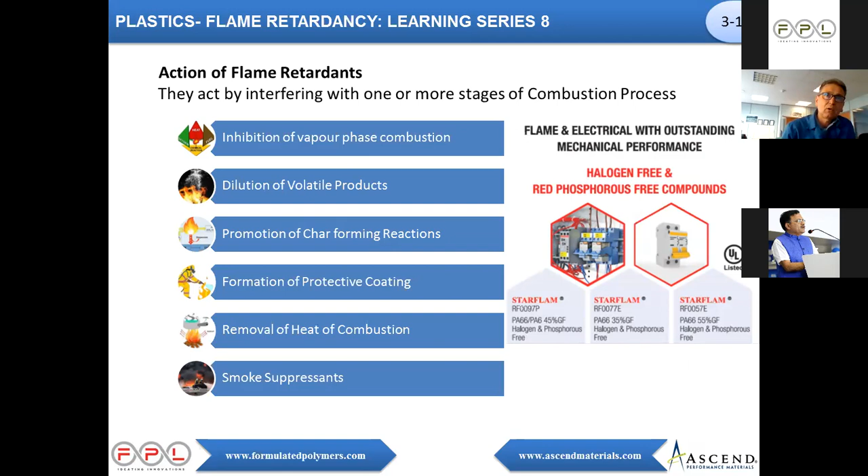Regarding the action of flame retardants, there's never just one single way to flame retard a material. But it's always the same principle: you have to break the triangle of fire, meaning you have to act either in the gas phase or in the condensed phase, or you have to remove oxygen from the surroundings.

In some cases we would advise red phosphorus despite its drawbacks, or brominated, because in some cases it's still the best. Nonetheless, we are moving in the direction of eco flame retardants, and among those we have a range too. Depending on the application and the acceptance criteria, the best one for you might not be the best one for a customer with a very similar application but a different market. So there too, we can help, but we need to know the requirements—only the requirements can help you make a good choice.